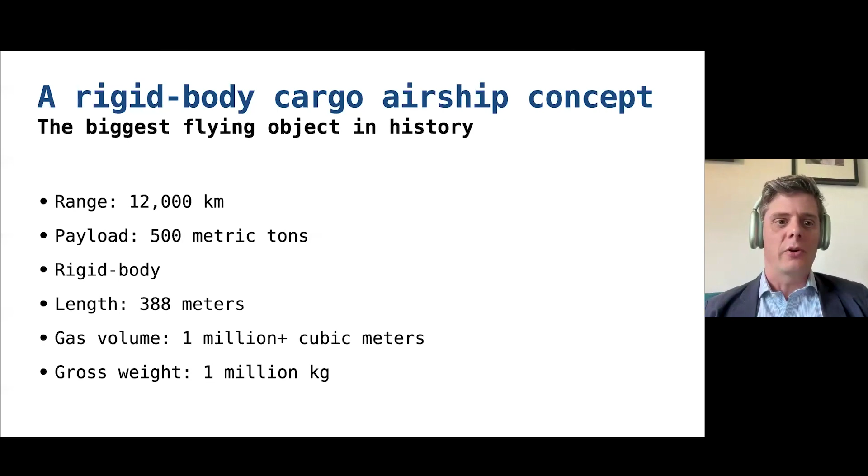So what would the demand be for this ship? If we assume, again, half the container market, that is 25,000 aircraft of this kind, which would put you about the same as the number of airliners operating in the world today. So just for scale, it's just a massive market that would be demanded for this airship if it existed.

So I'd like to talk about a few interesting design considerations that we thought about while we were doing this, again designing an airship specifically to serve this market, the international cargo container market.

And the first is autonomy. If you are flying trans-Pacific on one of these airships, they don't go that fast, it would take several days to cross the Pacific. You would need not just one crew if you were trying to do it manned, but several crews. You would need bunks, galleys, lavs, a lot of onboard infrastructure to accommodate these crews. If you can design the aircraft to be autonomous, or at least remotely piloted, you can delete a lot of those parts. You can really simplify and reduce a lot of the demands that would complexify your design.

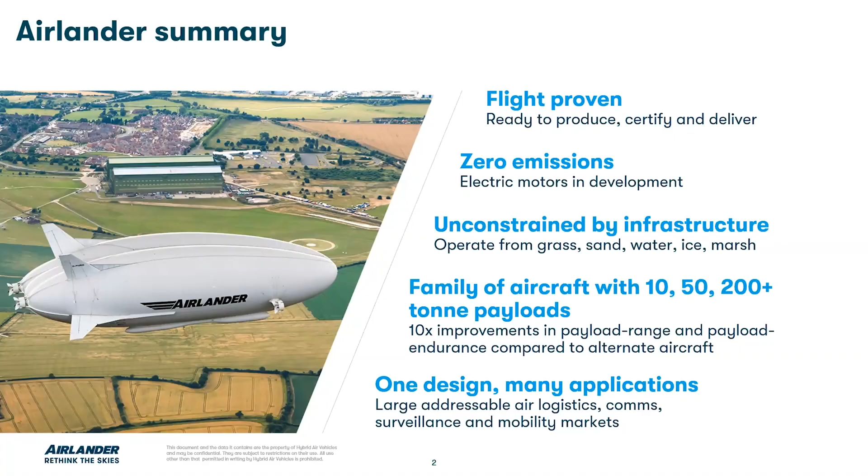It's a very simplified treatment of a transport efficiency question. All it's doing is exposing the fact that our transport solutions today are bifurcated between fast and relatively energy intensive aircraft, albeit with high transport efficiency, and our slower, more infrastructure dependent surface transport options - trucks, rail, shipping, and the like. We work with potential customers to open their understanding that there's a very big gap between those two options.

The previous speaker identified that gap - he said when you're in continental United States, trucking dominates. It doesn't dominate where there are obstacles in the way, because we've got a gap in our transport infrastructure that we haven't figured out how to fill with the equivalent transport efficiency. The way we conceive of it is putting an efficient mode of transport in place at 100 to 200 kilometers an hour - that's the spot to aim for, and that's what we're working toward with Airlander and the hybrid aircraft, where airships look to play very strongly.

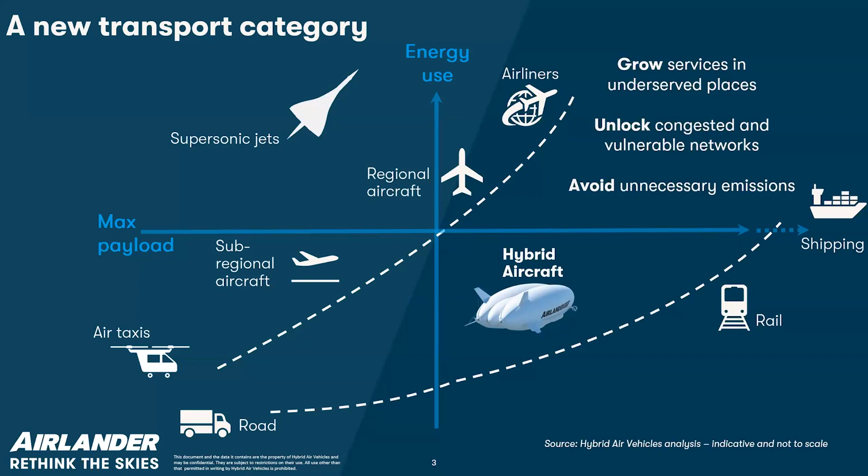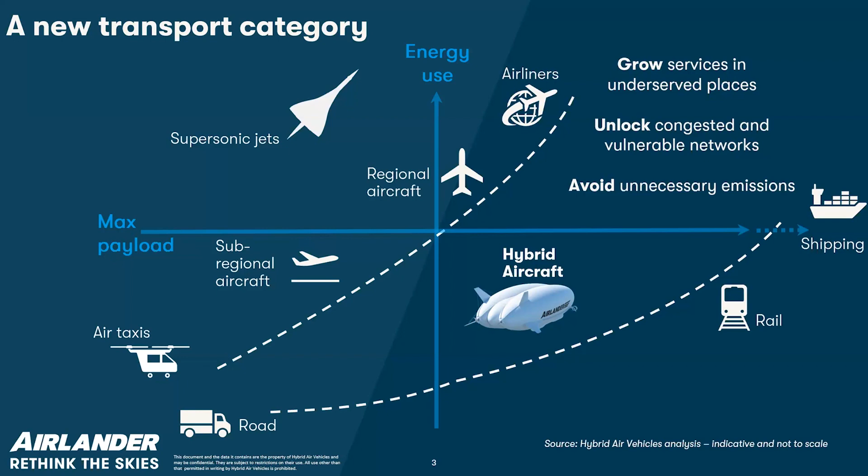And of course, putting something in that gap means there's a whole range of new services in underserved parts of the world, managing around bottlenecks and congestion in today's network without having to build extensive infrastructure to do that. More importantly, it means avoiding unnecessary emissions from transport.

So given that broad view of the market, we segment it down into three slices. The first is logistics, which we've just talked about at length. I think as well as containerized shipping, which I'd agree is a job for the very biggest aircraft, we also see connections at the edge of today's networks as being very important.

Canada is a brilliant example - connections to remote communities, connections to mining assets, the ability to get from the railhead up to remote parts of the world without needing to put infrastructure in to get there. These are the sort of problems helicopters would really have solved if we could have made them efficient or quiet enough, or with long enough range and large enough cargo. These are useful markets in and of their own right, we believe.

Part of our thinking is stepping through those markets before getting to the super large aircraft. We already talked, and Barry talked in the quick Q&A, about low density cargoes changing the fact that aircraft bulk out, or run out of volume, before they run out of carrying capacity. Changing that dynamic does open new markets. What we're doing here is focusing on our Airlander 50 product - that's 50 tons, or a little bit more, of lift, with 6 shipping containers in terms of space on board.

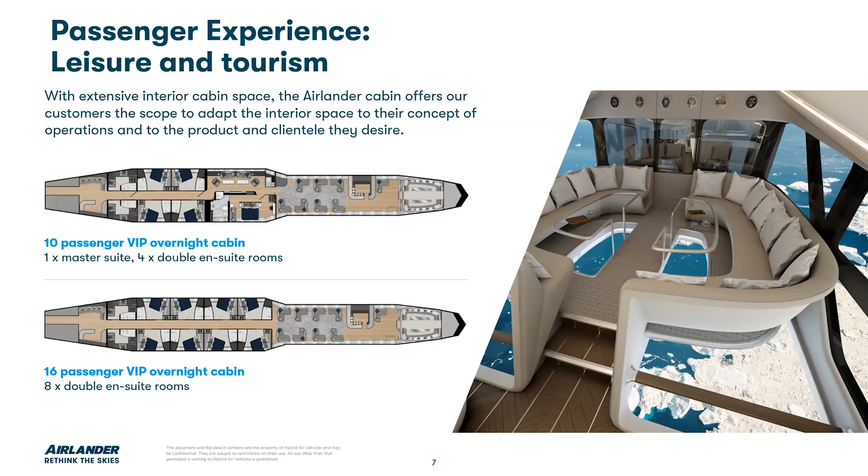We also have a market alongside that in using the aircraft for tourism and leisure. It's big, it's spacious, it's quiet. With the loads that are involved, you can put some really interesting features in there in terms of being able to view horizon to horizon. This market, the aircraft's resonated well in, and we expect our first 3 aircraft to go into these uses fitted out in the sorts of configuration that you can see here.

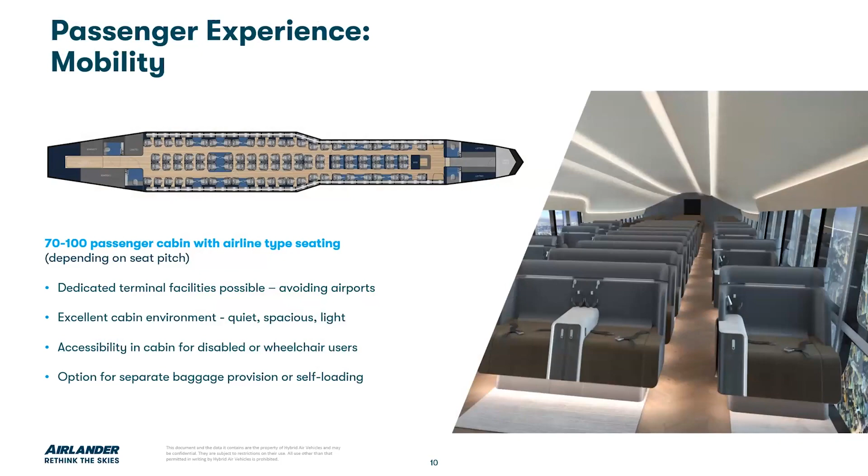This is very useful to us because it really unhitches people's expectations of what an aircraft is. We're used to 3 abreast seating and squeezing into the middle seat. Obviously, nothing could be further from the truth with a product like this. Back to the mobility and passenger uses, even in airline style seating, you're delivering space to the customer that is above what can be delivered on any other aircraft at the sort of price point that you need to hit to get economy travel and the economy travel offer working.

And then the final part of that, and I think the counterintuitive piece for a lot of people as we've gone into this market, has been journey time. Obviously the airline world and aviation in general works with speed as its major driver. And speed is not the advantage that we bring to the market with any product based on lighter than air.

So what we've really been doing is working to unpack the journey. How many of us travel to the regional airport, take the time we need to get through that regional airport, through security, to the gate, get on the aircraft, maybe have to then go and get a connecting flight and so on. So it's really about the end-to-end journey time.

And so these examples, there's a number of them on our website, are really designed to just pick apart how much of an advantage speed really is when we're using aircraft on very short sectors. And as you can see from the numbers here, it's not that much of an advantage actually.

Total journey time between Barcelona and Palma: 4.5 hours on Airlander, 4 hours 7 minutes by flight. The difference being that you've arrived in Airlander with a 90% reduction in the carbon emissions of that journey. And that message resonates well with governments who want regional air transport working in a net zero future. And of course, the next best alternative, nearly 10 hours on the ferry. So it's these sort of examples that have really helped Airlander move into this part of the market.

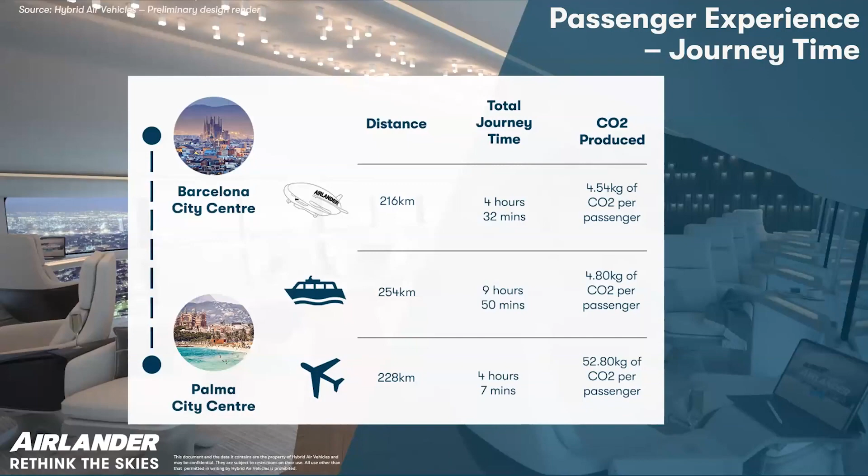Now, I just want to return to the point about how do you scale something that inherently needs to be big to be economically viable. And the way we've worked to do it is to create one single aircraft design at the Airlander 10 level that can do all three jobs.

That same aircraft design can be fitted out with 100 seats. It can be fitted out with a 3-ton surveillance payload and crew accommodation for a crew on board, or it can be fitted out with a cabin capable of carrying a 10-ton palletized load. So it's one aircraft design addressing each of those three market segments.

And we'll do the same at Airlander 50, one aircraft design with multiple uses. That's allowing us to step our way through markets where revenues can start to flow early, whilst always having an eye on that growth path into larger aircraft and moving more into that mainstream logistics market. With the added advantage that a hybrid, because we're getting multiple sources of lift from the same unit of volume—aerodynamic and aerostatic lift—will just be a little bit shorter and a little bit smaller for any given payload.

So that's very simply the way that we're pulling together different parts of the market just to move our way through and scale the product towards logistics.

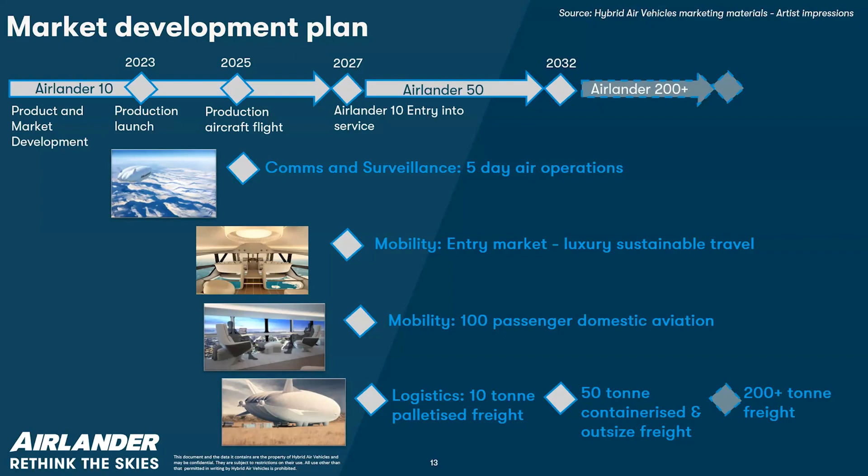We're not doing it on our own. We've built a very strong set of partners alongside us. AECOM, Collins Aerospace are working on electrifying the engines of Airlander. We have operating partners alongside to help initial customers get going with operations.

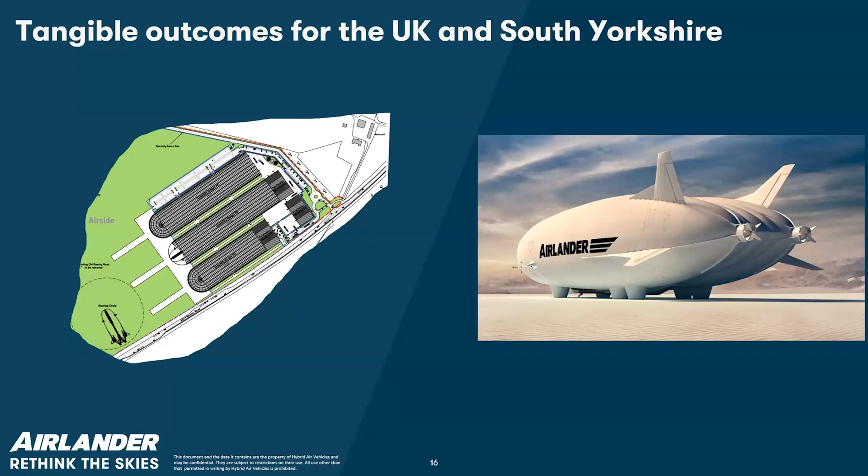We're also working with local government here in the UK. Alongside our work with Air Nostrum as a launch airline customer, we're working with a consortium in Scotland about early uses of the aircraft up on that Scottish transport sector. And we have the South Yorkshire region of the UK investing to build a production line capable of delivering 12 aircraft a year into the market. That's our initial rate of production, 12 aircraft a year from 2027.

So I'm now reaching the end of my allotted time. I'll just let a few photographs of what's behind us, what's got us here, run through while I hand over to Barry for any questions.

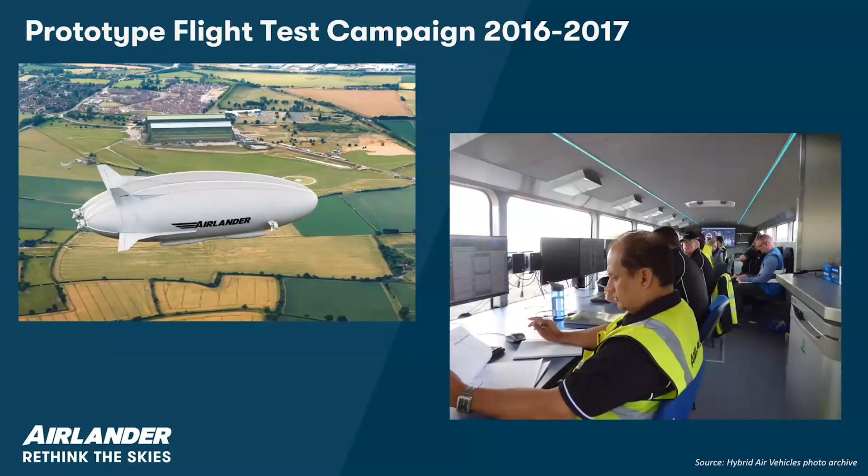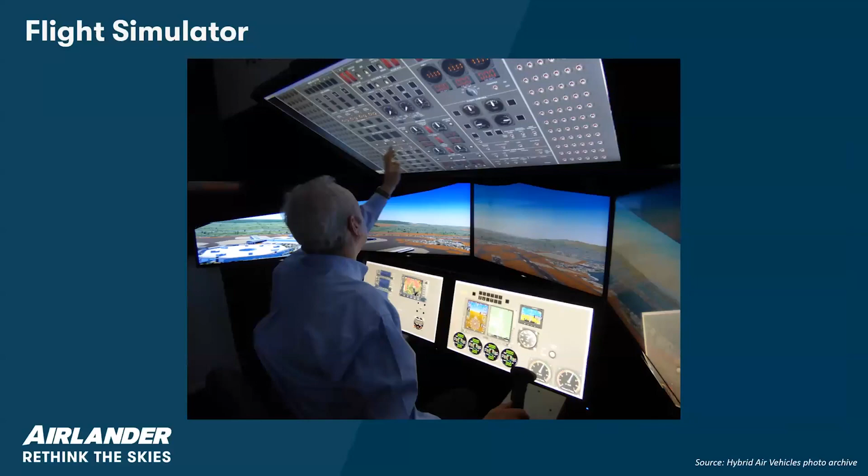Europe has a lot of peninsulas. There's a lot of water separating places. It seems like an ideal location. And you've mentioned in the past Liverpool, Belfast being a link. And I saw a presentation that looked at Stockholm, Oslo, how difficult it is and how long it takes to actually get there. Obviously these are the sorts of markets that would make sense. To me, it seems like the passenger market is one that's really waiting for you to develop.

Yeah, I think that chimes with what we're seeing. And I think it's very synergistic with what's happening with the electrification of regional aircraft. There's obviously a very strong drive towards moving the world's smaller aircraft either onto a battery electric equivalent, or perhaps in the long term hydrogen for those sizes of aeroplane. It's driving a resurgence of interest in what a good regional airline network can look like in various parts of the world. And Europe is a great example.

Of course, the bulk of mainland Europe is very well served by high-speed rail. But as you move out into the margins of the more difficult geographies, it's not served by that high-speed rail network. So we form that adjunct there. We can move low emissions aviation from a mindset of getting to 20 seats, maybe 50 or 70 seats by the middle of the next decade, into a view that actually 100 seats with low emissions is possible now.

And I think as you're doing that, your mind goes to the island nations of the world, and to the 8 out of 10 people who haven't got on an aeroplane yet. How do we start to serve and grow those markets? It also comes back to some of our most developed markets. There's really interesting work being done by NASA and some US universities about the latent potential of the regional airport network in the US, which is now underutilized as aviation has centered itself on fewer and fewer hub airports. So opening up and decentralizing even well-developed networks like in the United States—these are kind of hidden challenges, where differences can be made once you demonstrate that doing this at scale and with capacity is possible.

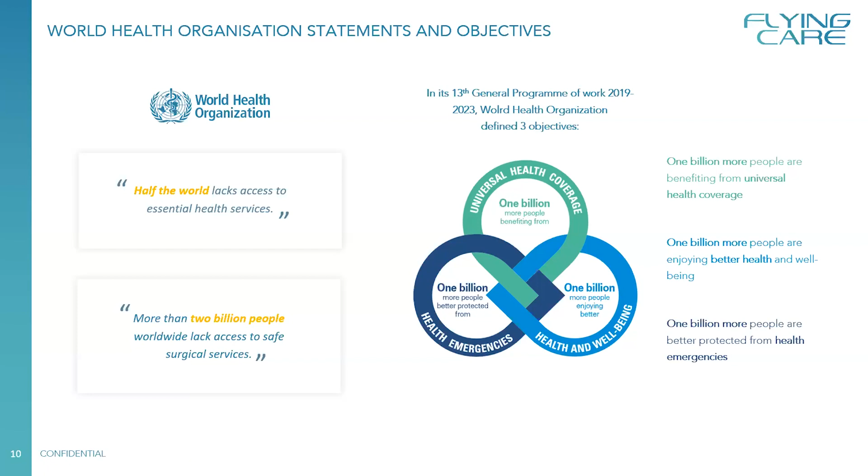A lot of these populations are located in territories with lower access to healthcare, but there are also developed territories, such as Northern Canada or Amazonia, that lack access to regular care because they are remote and difficult to reach. With the project, we aim both at developed areas where access to care should be equal, at areas where geographical constraints suppress access, and at areas where healthcare infrastructure development is still not finalized, where we could help support it.

At the same time, we focus on several types of disease, but we look a lot into non-communicable diseases, such as cancer, cardiovascular disease, and other pathologies, because they are one of the main sources of death that we could inhibit and change with a solution like ours.

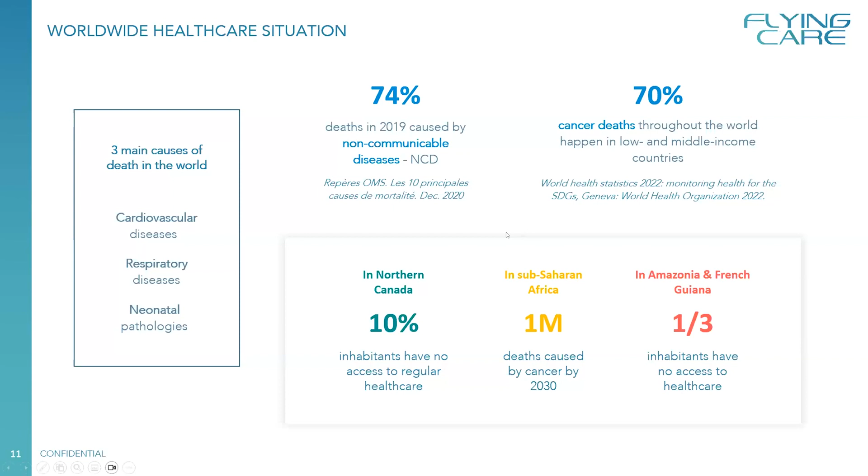These are the three main study zones we started investigating with Flying Care. As mentioned, the northern part of Canada, where there is a lack of equipment, specialized care, and operating rooms. We also investigated Amazonia, partly because of discussions with French Guiana, a French overseas territory, and we looked at applications in Brazil because the constraints are similar.

Finally, we made a lot of investigations in sub-Saharan Africa as well. Of course, it's a very diverse zone with different characteristics in different countries, but the needs are there, and the solution we are deploying would be very efficient in several of these countries.

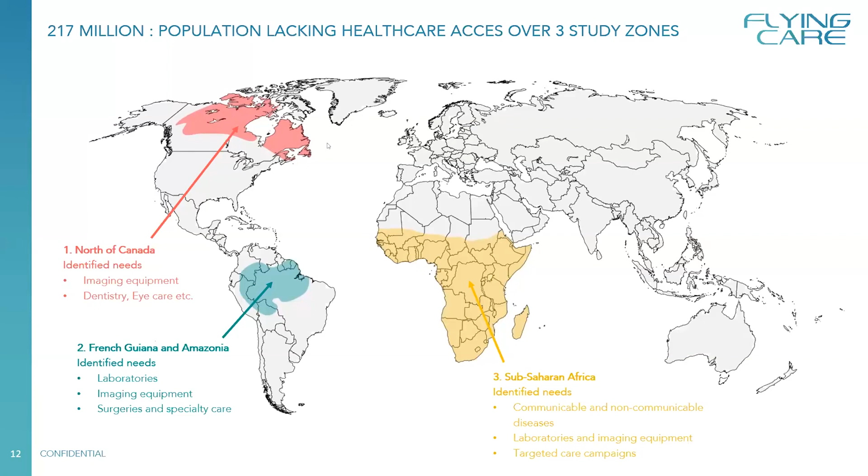Looking at the main challenges we already saw in the video or in the WHO statements: first of all, healthcare is centralized, whether because infrastructure isn't available in the area where we want to operate or because it doesn't exist at all in the country. Several communities don't have access to care. At the same time, implementing new infrastructure can be very costly, and maintaining it is even worse. Finally, because of the lack of infrastructure, several pathologies go undetected and untreated, leading to high morbidity.

What we are looking to do is provide a decentralized healthcare solution. We mutualize the healthcare facility between different areas so that everybody has equal access to care. At the same time, with this mutualization, we keep costs down, becoming quite cost-efficient as an infrastructure for each medical tour. Finally, inside the hospital, we want to ensure high-standard medical infrastructure, meaning we have the possibility of performing safe surgeries, and that these surgeries are available anywhere.

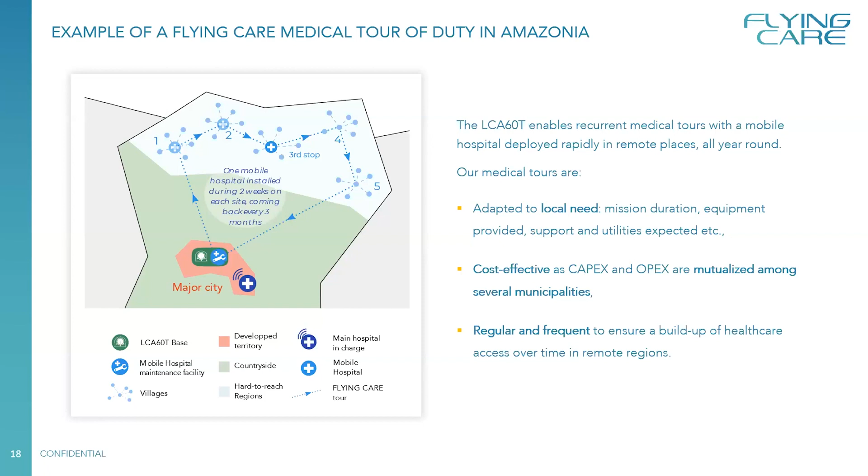One of the important parts that maybe I failed to mention before is that this project is more aimed at medical development, so to provide a solution all year round for communities. It's not aiming directly at providing a medical facility in the aftermath of a disaster, but of course, if we are in a region and such a disaster occurs, it's also a very interesting solution for this type of scenario. So that's something we are investigating as well.

And finally, this is just a quick glance at what we are doing. So it's quite generic, but this study consortium is working at identifying needs, defining the engineering—what's the design of the mobile hospital, the strategy, and how to organize the operations for the airship and for the solution overall. And then, of course, we have all the financing and business plan parts to be able to set up something that's viable in the long term. So that's the elements that we wanted to share with you.

I think I'm almost on time. So yeah, if you have any questions, I would be happy to answer them.

Well, thank you very much, Octave. That was very interesting, and certainly a lot of questions came in from different areas, and we won't get to them all. So, but perhaps you can also address those privately yourself afterwards.

You know, this notion of a remote hospital is something we have talked about in Canada, because right now we have to uproot people from their communities at fair expense, fly them down to the south, sometimes with their families. They're here for a long time. There's a lot of disruption. So this notion of being able to take the care to the people is certainly attractive.

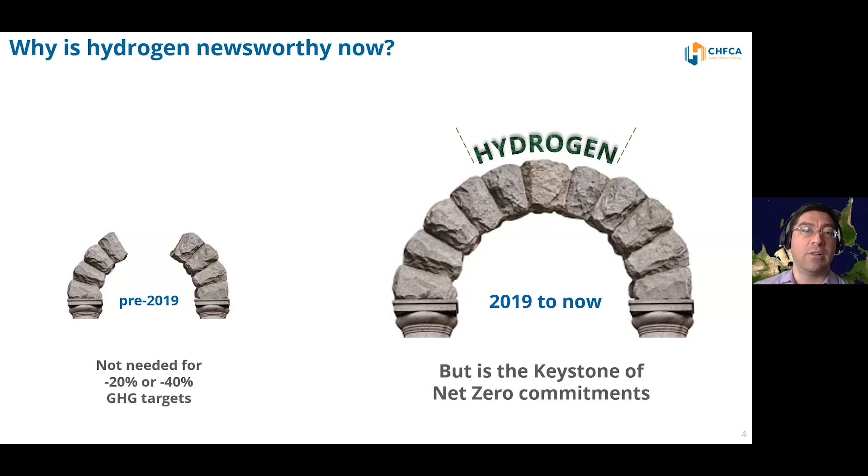In terms of hydrogen, just a super brief 50,000 foot preview. Hydrogen has been newsworthy for the past few years, mainly because governments have started to talk about net zero targets. If you're aiming to reduce emissions by 20 or 40%, you probably don't really need hydrogen for that. But if you want to get to net zero or reasonably close, you need a whole bunch of clean hydrogen.

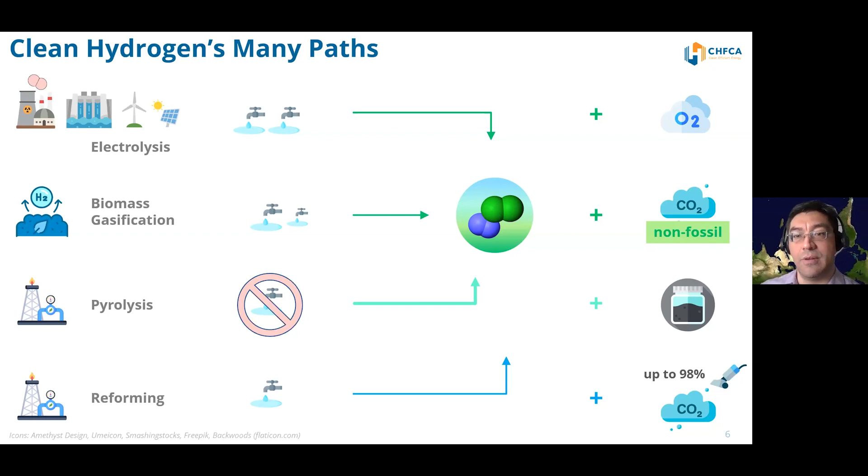A bit about us as an organization - the Canadian Hydrogen and Fuel Cell Association. We're currently trying to figure out a rebrand so it's a little less bulky of a name. We're a pan-Canadian organization with affiliates in BC, that's me, in Alberta, Ontario, and Quebec, and there's a group out in Atlantic Canada as well. We recognize that different regions will have different priorities or different best paths for scaling up the use of clean hydrogen. We have members across the value chain, and we've had some success with government in our interactions with them. It's a very positive and inclusive approach, kind of like how airships can happily coexist with aircraft.

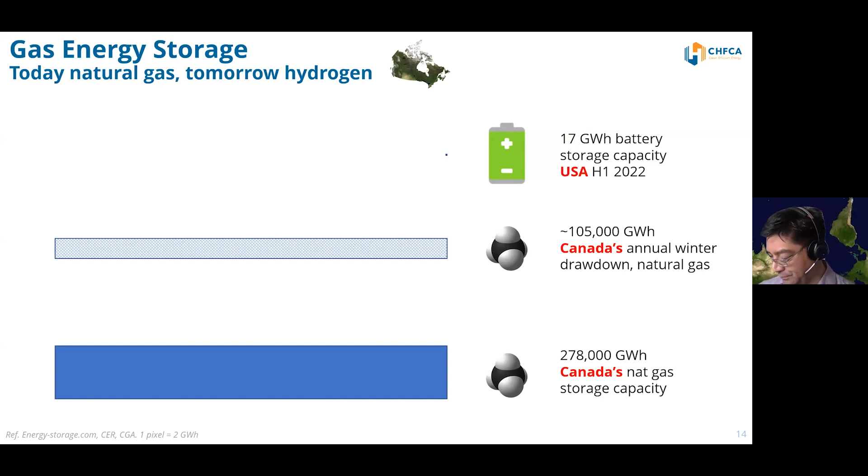I do hope that, much as I believe the last speaker had mentioned 94% accessibility of water, we kind of hope that we can get 94 or higher accessibility with hydrogen. That's kind of one of our long-term goals.

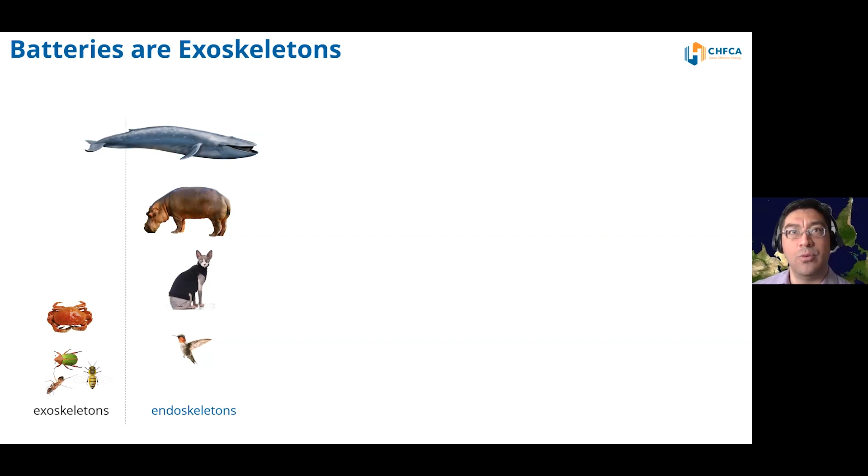In terms of the use in transport, an analogy I've used which seems to resonate with people is that batteries are a little bit like exoskeletons. If you're a small creature in nature, chances are you've got an exoskeleton, maybe a shell type of exoskeleton. And that's because at a small scale, there's nothing that can beat a shell on strength to weight ratio. The corollary is that all larger creatures, from a cat on up, tend to be vertebrates. They have an interior skeleton - an endoskeleton.

So in transport, we see a similar kind of approach where battery solutions are likely to be dominant on the smaller side, the smaller vehicles, some larger vehicles as well, some buses and trucks, even some short-range ferries perhaps, with hydrogen taking the larger set of the transport kingdom. In some cases with airplanes or with boats, it might be a liquid fuel derived from clean hydrogen, ammonia perhaps, or some sort of synthetic fuel.

Airships - I promised to put a blimp up here once I can find a little graphic. So just let me know if you guys have some good icons out there.

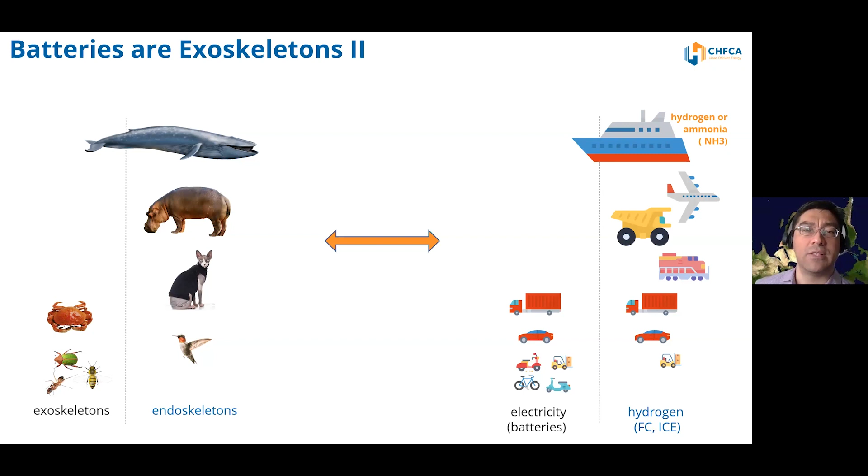One other thing I want to leave everyone with: hydrogen is quite niche, it's gotten a lot of attention now. There is reason for confidence and celebration in how the use of hydrogen is gradually scaling up.

From my time doing work in the wind energy sector, I had plotted out the growth of the very earliest wind turbine deployments in the 1990s. This is the very earliest phase of the wind industry, and it rose - I think this is a logarithmic chart - but rose maybe ballpark 30% year over year. If you overlay the solar scale-up but just shift it by 8 years, so instead of being the 1990s it's the 2000s, you can see on the legend on the graph there that the solar photovoltaic industry grew along a very similar trajectory.

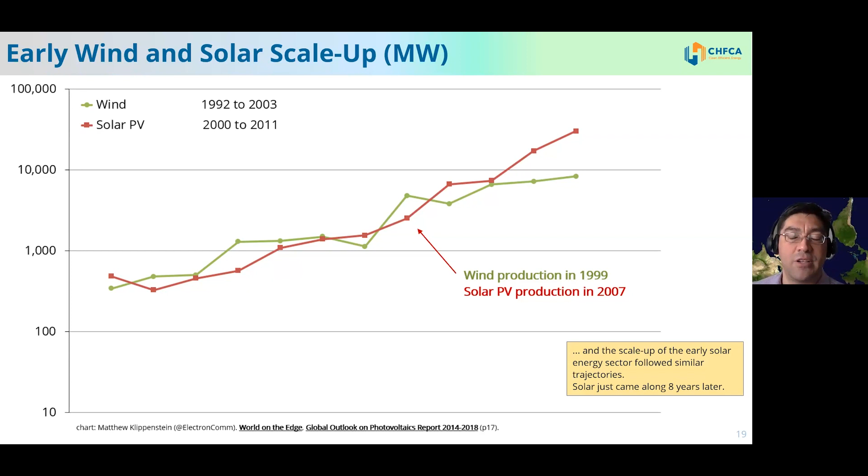It's kind of a neat, nice coincidence. I spent a number of years in fuel cells, hydrogen fuel cells, and those too are following a very similar trajectory as the solar and wind did. It's just the fuel cells are about 15 years slower than even solar - so 15 years after solar scaled up, which was itself 8 years after wind scaled up.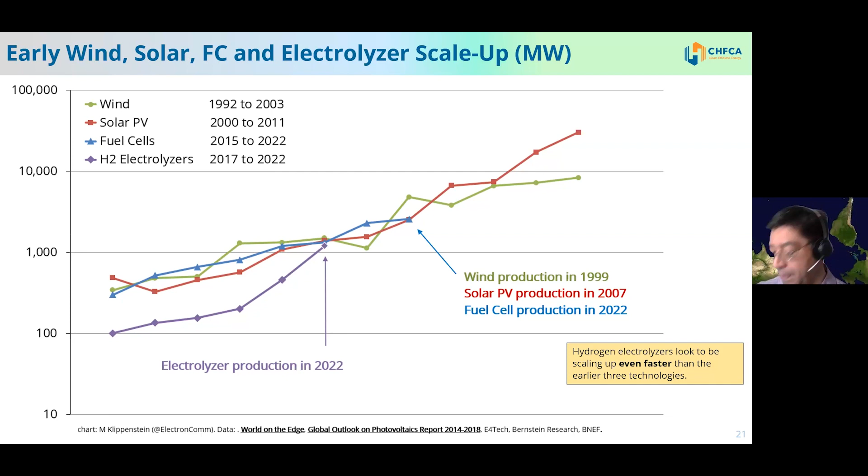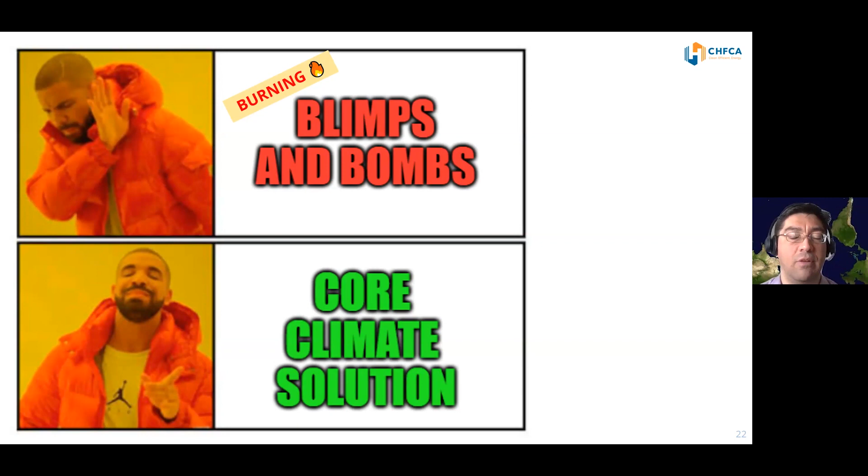I use this slide in my outreach with city councilors and things like that. I guess I should emphasize that it's actually burning blimps, not just blimps themselves, that people think of when they think of hydrogen, and we're trying to have it recognized as a core climate solution here.

The last slide I want to leave everyone with - this may be a similar analogy in the airship space - is that hydrogen today is a bit like cell phones, mobile phone networks 40 years ago, because at the time there were no networks. A city would have maybe one cell phone network going along the highway to the downtown core to wherever it was that rich people lived. Cell phones were more expensive, bulkier, terrible phone quality, didn't have very good data transfer. And you also had a lot of improvements happening on the landline space.

So a lot of folks underestimated just how much cell phones would grow because there was no network to begin with. McKinsey made a very famous business study flub. And a very similar thing is likely to happen with hydrogen, as we don't have much of a network now, but it will scale up, and new uses, perhaps airships as well, will find their strong spots.

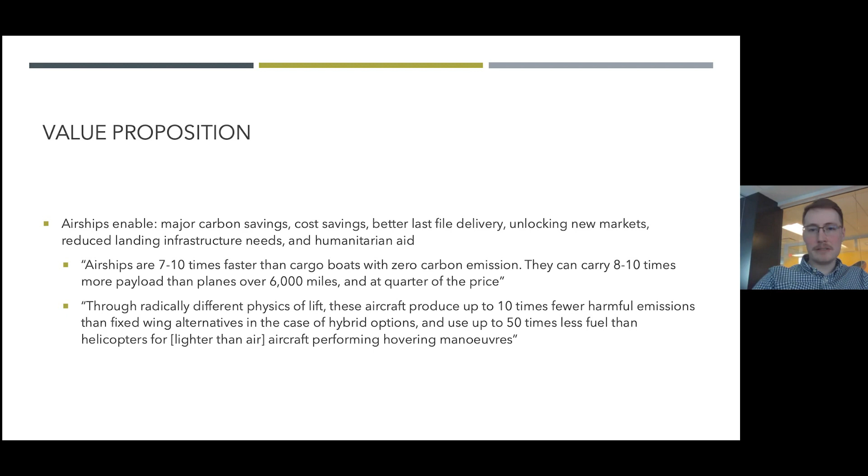The barrier to some kinds of airships is currently the cost of helium. So some airship companies have elected to move to hydrogen. In the United States, we see H2 Clipper leading the way in that. It's produced by this contemporary difficulty surrounding helium. Helium is about 67 times more expensive than hydrogen, at least at the time of my writing.

When the last legal writers were considering hydrogen versus helium, they were writing in the early 2000s, where there was only an 8 times difference in price. So they speculated that no transition would be desirable nor occur because the non-flammable nature of helium meant that hydrogen was perceived as less desirable, even though helium might be more costly.

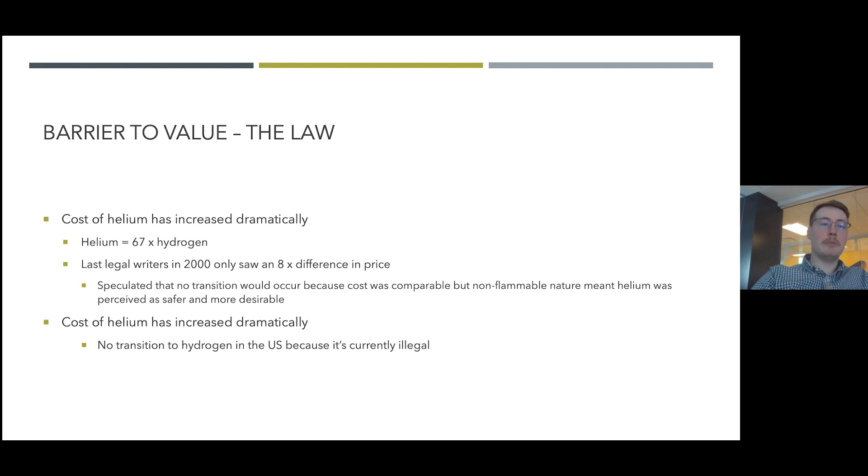Since then, the cost of helium has dramatically increased, like I said earlier. So I think there's renewed interest in whether or not hydrogen could be a viable lifting gas solution.

That brings me to the institutions that govern laws. I want to start with supranational organizations. Those are the organizations that sit above any individual nations because they are made up of a collection of nations. You have the International Civil Aviation Organization, or ICAO.

Their mandate, their purpose, is a specialized agency of the United Nations that coordinates the principles and techniques of international air navigation and fosters the planning and development of international air transport to ensure both safety and orderly growth.

For non-legal folks, nations implement these ICAO standards and recommended practices, called SARPs. These are technical specifications adopted by the Council, adopted by nation states, and then promulgated through their domestic organization. ICAO currently oversees over 12,000 SARPs related to air transportation.

They've published annexes to international air transportation treaties, and there are 19 of those that also amend the existing treaties. There's also national implementation of procedures for air navigation services, or PANS. These are documents approved by the Council of ICAO and recommended to states for worldwide adoption.

The reason I'm talking about this at all is that ICAO is responsible for what some of you who have flown airships or worked in the industry would know as certificates of airworthiness. That comes from ICAO's mandate.

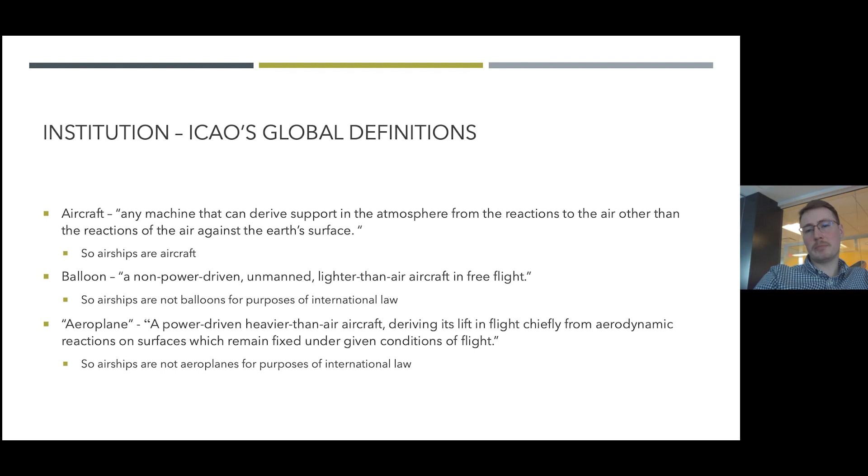And then aeroplanes are heavier than air vehicles with a few other qualifications. That itself does not describe most airships, or any airships to be precise. So airships for purposes of international law are not airplanes. I have this document I wish I could share.

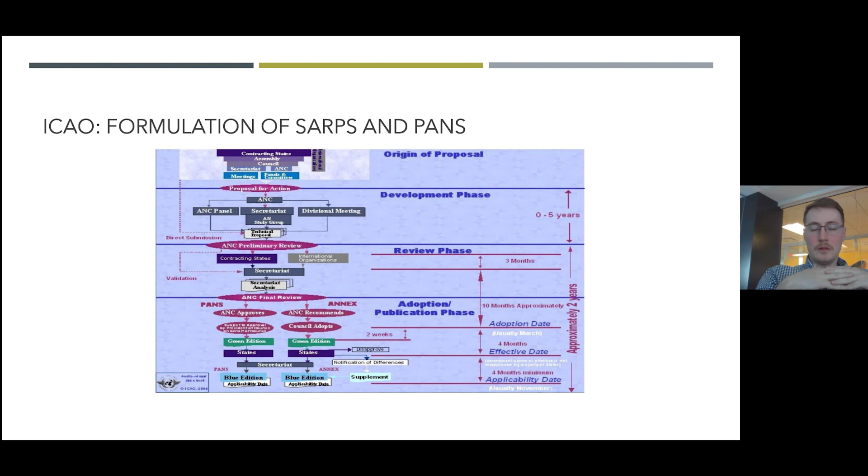It's a very busy chart about how regulations are determined or promulgated, formulations of SARPs and PANs at the international level, but I'll save you the description. The purpose really is that there are laws, rules, and regs that have to be implemented at the domestic level. In the United States, the FAA is responsible for doing that, and in Canada, it's Transport Canada Civil Aviation.

In the United States, which is where the primary focus of my research is, airships designed for hydrogen, airships lifted by hydrogen cannot be issued a certificate of airworthiness from the FAA. There's two reasons for this. The first is that the airship design criteria, Subpart 4, 4.48 of the FAA from 1995, still governs current design criteria.

And they indicate that any lifting gas to be used must be non-flammable, which excludes hydrogen. The difficulty then is that without a valid certificate of airworthiness, it's illegal to fly a craft under 14 CFR Section 91.203. So either a hydrogen airship would have illegally or fraudulently maintained a certificate of airworthiness, or it would be a craft flown without a valid certificate, which would still be illegal under that same law. So in neither way does the current legal environment allow for hydrogen-based airships in the United States.

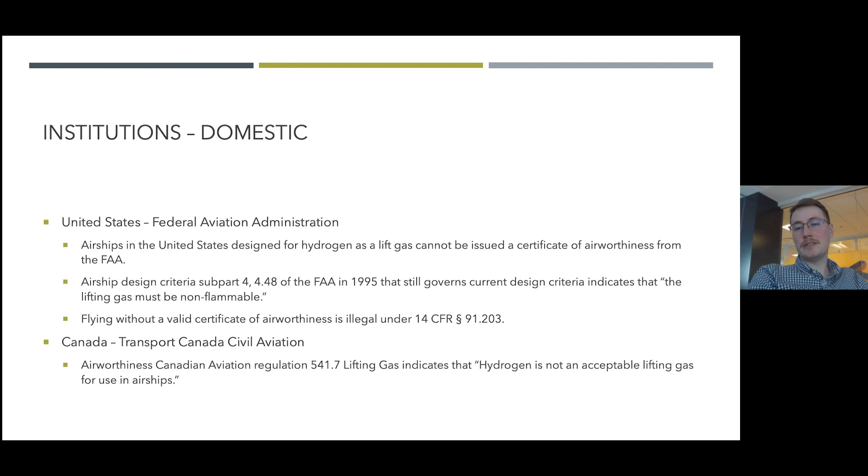In Canada, the Airworthiness Canadian Aviation Regulation 541.7, regarding lifting gases, indicates that hydrogen is not an acceptable lifting gas for use in airships.

And this creates an international legal problem, because the European Aviation Safety Agency, EASA, created a certificate of airworthiness program for airships, SC Gas 2355, in many parts. Part B, for our purposes, indicates that if a lifting gas is toxic, an irritant, or flammable, adequate measures must be taken in design and operation to ensure the safety of occupants and people on the ground, in all envisioned ground and flight conditions, including emergency conditions.

So the implication is that hydrogen can be used as a lifting gas, even though it's flammable, as long as safety provisions have been put in place, both in design and operation. And the international difficulty this creates is that nations are compelled through international law to recognize the validity of aircraft certification that has been properly done by another country.

So any hydrogen airship granted a valid certificate of airworthiness through EASA could fly to the United States, but while in the United States, its certificate of airworthiness would violate US domestic law, and the US would also be compelled to recognize this certificate as appropriately handed out through EASA. And so it creates this international law difficulty.